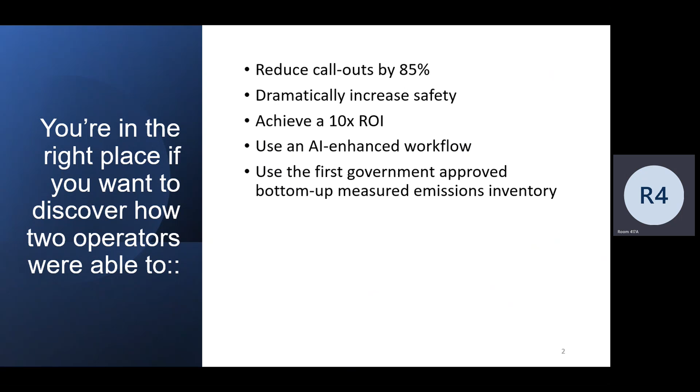All right, okay cool. Well, listen, if it's just, we can ask whatever you want, and I'll even give you some future looking stuff. Anyway, so this is kind of what I pitched in the thing, and I'll tell you why. You've seen this camera thing, and you know who I am.

In my past, I was an IT guy, and I actually started a magazine called Windows NT Mag in the '90s, and it went worldwide. It was 160 countries, 13 languages. It was a partnership with Microsoft. Yeah, you might have read it. So IT and software were my gig, whereas David was the oil and gas engineer and stuff like that.

So anyway, I don't know if we mentioned it, but we got the Top Innovator of the Year award from Darcy Partners. Are you guys a member of that, or do you even know? It's like an analyst group thing, kind of like Gartner. Anyway, the cheat sheet, that's one of the things I do.

All right, so I'm just going to tell you. A large operator, who I will tell you later since this is being recorded—I'll tell you exactly who it was off mic—anyway, they came out, and it was ops who brought us in.

They said, hey, why don't you build out 11 new sites without hiring night operators, or night riders, as you call them? They want to eliminate gate operators, eliminate 85% of their call-outs, dramatically reduce risk exposure to emissions and safety violations, and prevent liquid leak safety related issues.

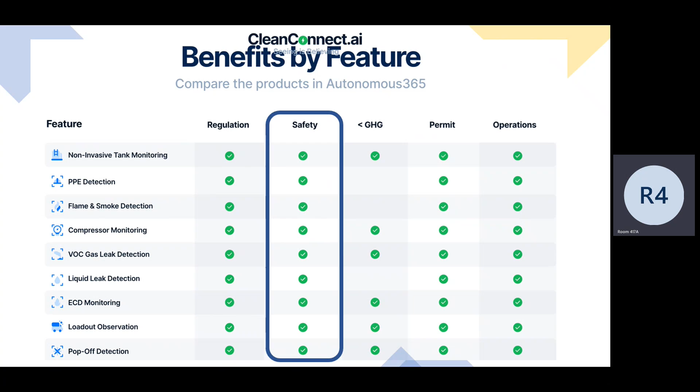Now, this little chart here was actually put together by the operator. I said, hey, here are all these things, but how do you view them? And so they said, well, hey, there's a regulation for all of these, but safety is checked on all of them. Then they said, hey, all these are for reducing greenhouse gas. So you can see some are safety related, then permit, and then ops. So the ops guys gave us this grid, and I said, so all these are safety related - let's look at that.

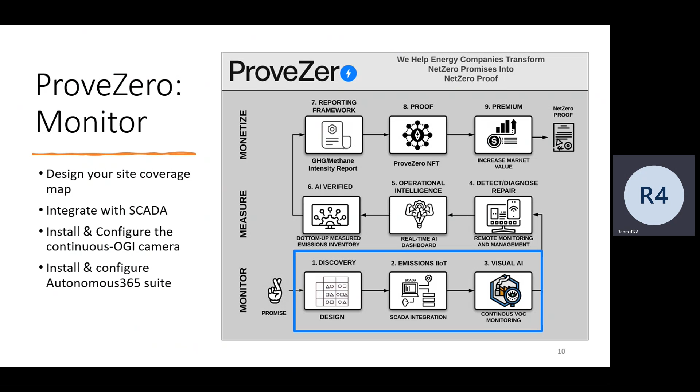This is our process. So when we start out with a new client, we do three levels: monitor, measure, monetize. Monitor is first - we do discovery, figure out which sites, what they look like, configuration. Then we figure out how we're going to integrate it with SCADA, and then we put the computer vision stuff on there. So that's the first one.

If you're not familiar, but you probably are, the OGI cameras, see VOCs, which is pretty much in a simple way, ethanes and alkanes - a bunch of ethanes and alkanes, right.

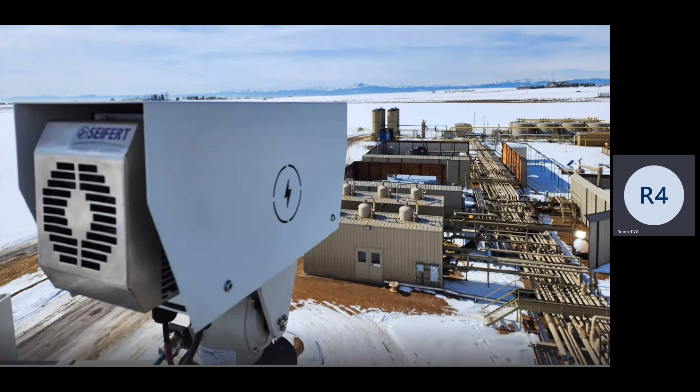Then you've seen this one here, where we mount it up on a pole, and camera placement is pretty key. We've got it down now to where we go in, we have a drone that goes up there and we look at the optimal placement, so we can see which angles are best to fit it in there. And then we get approval from whoever owns the site, ops. And then there's usually third party guys that already have MSAs that come in and do the infrastructure and all this stuff.

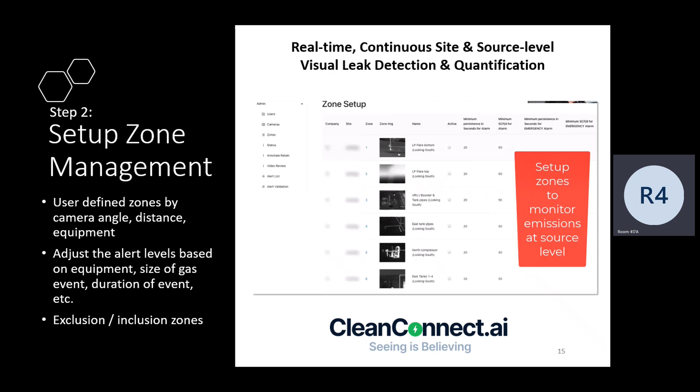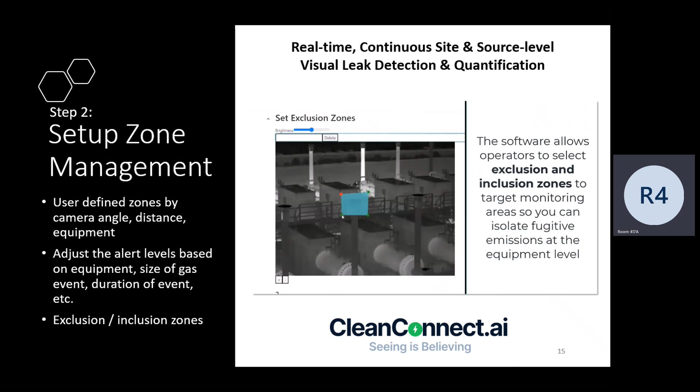This is what a bird's eye view looks like from our camera looking down. And then we do the tour stops, which is really key. We help find the optimal placement, because what we're looking for is the tour stop, name it right. And then we also now tie that in with the subpart W component level, so we can make sure it covers all of the required LDAR stuff you're supposed to cover. We're strictly talking the camera now.

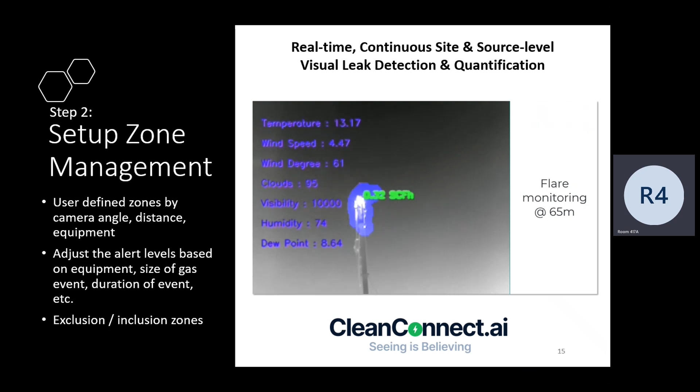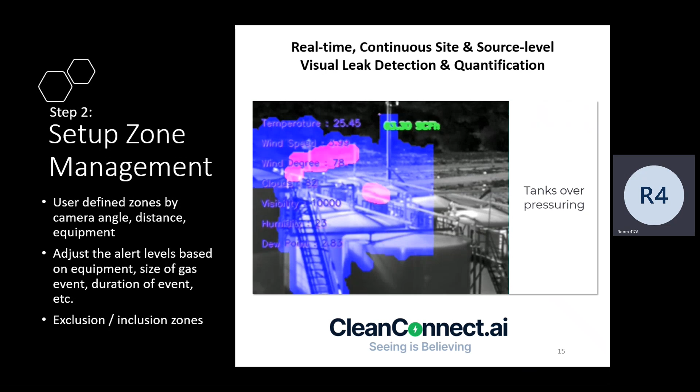Can we do this with the methane only, or the other one - same thing? They both can, one camera can't do both. So the cooled core can do everything because it can see all the alkanes, ethanes, and all that stuff. The methane camera can see methane only, but it's also an IR camera, so it can do liquid leak detection, can do a lot of things - it's not just gas.

So all this prep work, we do this in a simpler way with satellite photos. We usually start off with the Google Earth photo, where you see the layout of the site, and we can literally spot and dot something like that ahead of time, just looking long-term at cost and deployment.

And if we're doing site survey teams for all these sites, it's probably hard - but we're pretty good now just literally with the Google Earth drawing. There's some other stuff we do where, if you have other engineering drawings of the site, we're really good with some of those other models, the 3D models of sites, if you had those.

Just got offered to get 3D. Oh, is that right? Okay. Well, we're flying helicopters around our equipment, and they said they could 3D model it if we want.

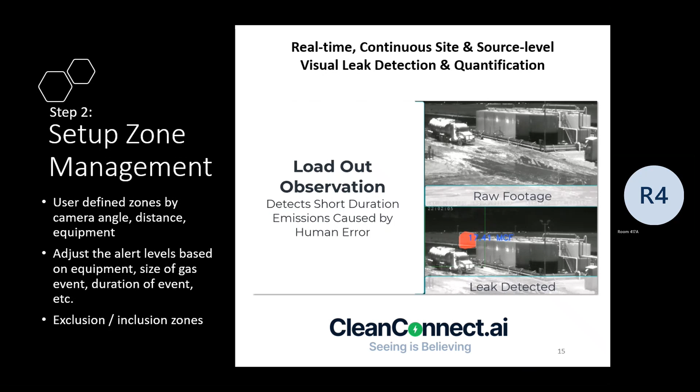We're integrated here on SCADA. You've got the cameras, the edge, going to the SCADA system, which is the point of truth. Then we have our dashboard to set the alerts, and other more visual alerts you can get. We do integrate more with SCADA, and I'll show you some stuff like that.

It would be a multi-connection. So some data you'd be looking at would be going to Ignition data, but some would be going to our dashboard. Maybe somebody like a Validere — we can API into anything up here.

This is what we had to do to get our Alt-AIMM: source level detection, blind testing, LDAR equivalency using the LDAR SIM model, the Alt work practice. Two operators endorse it, which is PDC and Civitas — that's public — and the EPA approval from EPA Region 8. And then the Alt AIM Reg 22, so it adds all the stuff from Reg 7: approved alternative workflow, approved tank level monitoring, approved loadout observation, and an alternative for Appendix K.

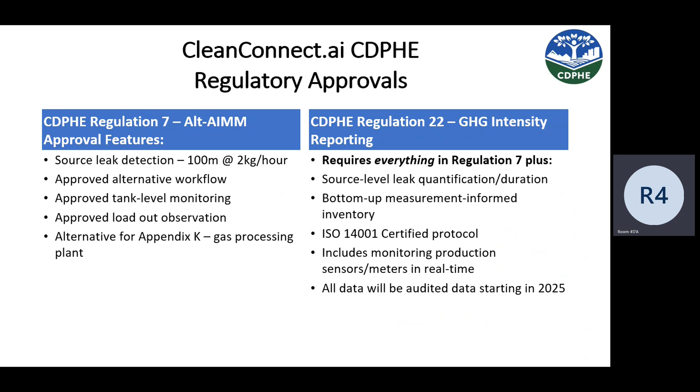We've also got approval for GHG intensity reporting — source level leak quantification and duration, bottom-up measured informed inventory, ISO 14001, which is a GHG certification. We also included in our protocol how we do the Clean Connect stuff. So all that's geared up for an audit in 2025.

Then our clients are literally allowing us to tie into the SCADA, so like to reboot a separator — you can fix the cold venting event remotely.

The way I like to put it: you're at your kid's birthday party. The old way, you get an alert, somebody gets in a truck, drives out to the site, and you miss your kid's party. The new way, you get an alert, you see it, crap, you fix it on your phone, you put your phone away, an hour later it alerts you and says, hey, I verified it's fixed, I closed the ticket out. So we have a workflow system built right in.

That was government approved, which is cool, right? Sounds good. I don't think we'd ever allow it to interface with our process control, but still you could use that data to hop out — just hop over to your actual app and do it. Yeah, so we don't do it, but you do it on some other SCADA system.

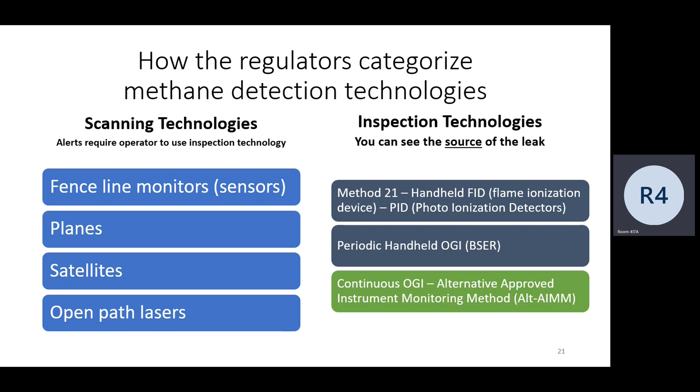So if you want to see the comparison, this was provided by a client. They had a fence line monitor around their site and they did a blowdown event. The fence line monitor didn't go off at all — didn't even reach 1 part per million. So the client provided this and said, here's what your camera saw. You see the blowdown, you put your colors around it, you give us a quantification — pretty dang clear what happened, right? This side, it didn't go off. So that's the diff.

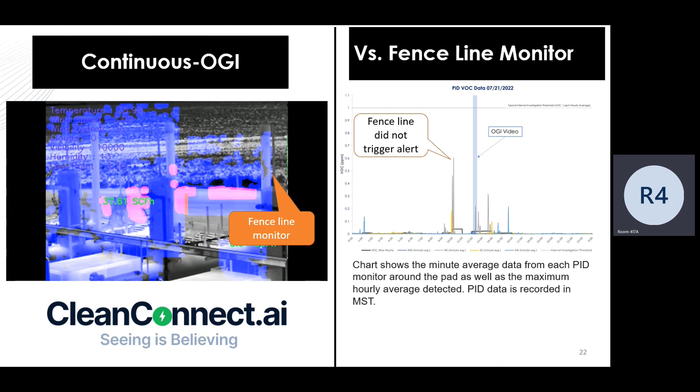And this was provided by a client who we thought was going to be so pro fence line monitor, and they came in and literally went 180 and said, no, we're done.

Leaks are not random. This could change over time, but here's what we're seeing: cold venting, tanks overpressuring, loadouts, and then other. That's what we're seeing.

What's cool about cold venting is all of our clients with modern gear have been able to fix this remotely, just reboot it. What happens is the pilot light goes out and the state is off, so SCADA says it's on, but it's actually off.

Tanks overpressuring, we're working on this with the clients because they see it over and over and over again. So they're like, how do we fix this?

Loadouts, pretty easy to fix. You call up the pumper truck company and tell them that if they mess up again, you're going to fire them. And they said, well, we didn't mess up. Dude, I saw your truck arrive. I read the license plate. I saw John Doe get out. Literally, everything is observed in real time. There's no way to wiggle out of it.

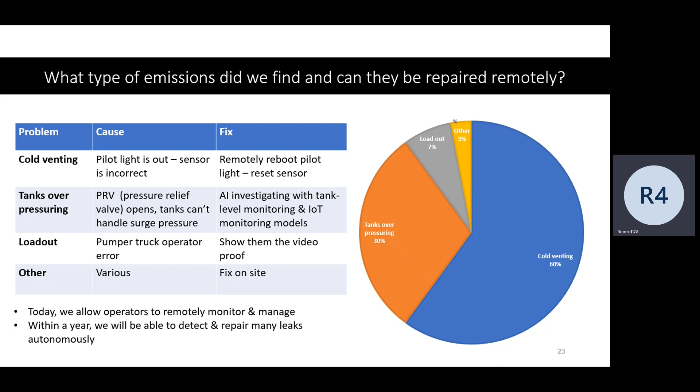So now there's other stuff in here. We see compressors leak, we see other stuff. But it is so not random. And unfortunately, the way the regs are written, it's as if leaks are all random. They're not random. There's certain stuff that ops sees all the time, which means its emissions are an ops problem.

The big change we see here is the impacts of Quad OC, number one is staffing and call out. I don't think a lot of people have done the math, but I started doing the math here, just to give an idea. This is part of my cheat sheet.

The big thing here is LDAR frequency is going from Quad OA every 6 months to quarterly, and also with Quad OC quarterly. The big deal here is this is all the sites from November 15, 2021, and all the sites before, all of them. Nothing's grandfathered in with Quad OC, zero. So unlike Quad OA, which kicked in 2015, Quad OC says all sites are covered.

I've had people call me up and say Quad OC is literally increasing my LDAR by 700% because it's covering a whole bunch of sites I never even had to look at.

Now, how does that compare to Colorado Reg 7? Well, Colorado Reg 7 is monthly. And for pre-production, Colorado is continuous. From 10 days before the drill hits the ground, all the way through the first 6 months of production, it's continuous monitoring required. So Colorado is even beyond that.

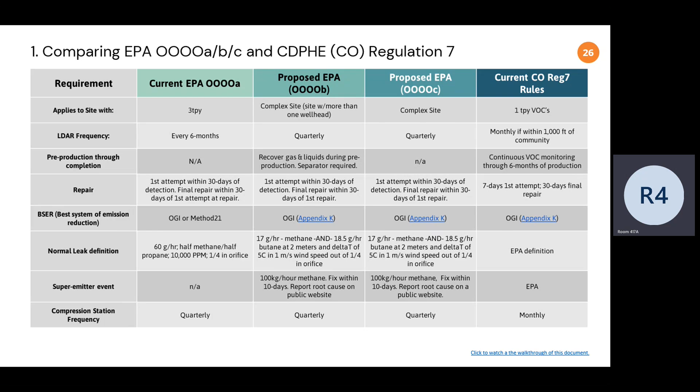Just to give you an idea what that looks like, here's Colorado's LDAR 2021 summary: 147 companies reporting, 14,796 sites inspected. Check this out, in Colorado alone there were 599,006 inspections. So in 2021, Colorado did more LDAR inspections than all the rest of the country combined.

That's the level when you go to monthly, this is how big it was. Average 40 per site, this is all from their actual LDAR summary. So Colorado is spending a crap ton of money on LDAR. If the average human can do 400 inspections, then you need 1,497 inspectors in Colorado.

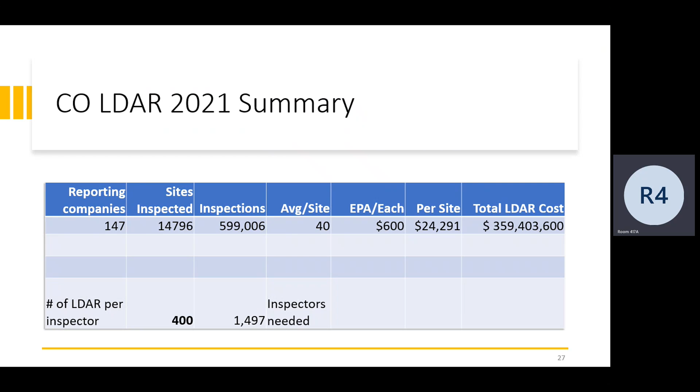So big idea: what if you could reduce 85% of your LDAR schedule callouts by doing automated inspections? That would eliminate 509,000 callouts in Colorado alone, if they started little by little replacing manual LDAR with autonomous LDAR.

Putting a person in a truck and sending them out to a site is the number one safety issue, according to the operators I talked to. In addition, it saves a lot of money on people, trucks, and insurance.

And in some states, like Colorado, they're requiring all the operators to replace their entire fleet with EV trucks. But I tell them, hey, it's a lot cheaper to lower the need for trucks rather than replace all your trucks with EV trucks, if you can eliminate a lot of callouts.

Now here's the math for Quad OOOOc. You double the frequency, so instead of 2 times a year, now you've got to do 4 times a year, and for all the sites going all the way back to 2003.

So I started doing the math. That will cause operators to add collectively across the US 1.6 million new LDAR inspections. That's a 471% increase. So using the EPA's formula of $600 per LDAR, that's an extra $831 million of LDAR expense.

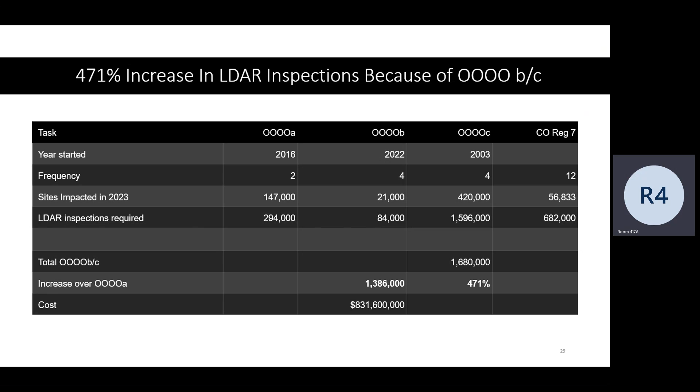So other stuff we do, the tank level monitoring, using the long wave, and we're as accurate as guided wave radar there.

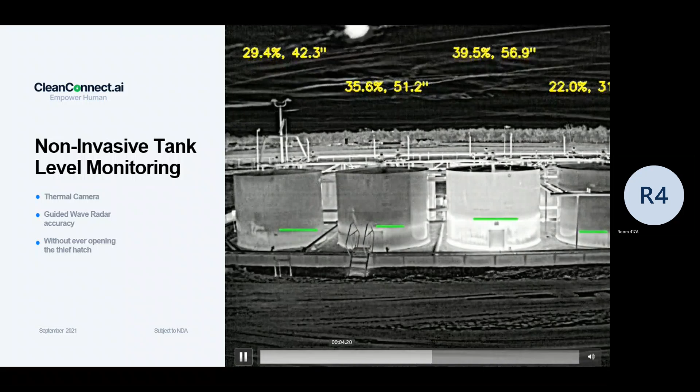And the liquid leak that we do. Now this liquid leak, the first round was done with fixed mounted cameras that we're looking at tanks and stuff, but the new one we have is part of the rotating one. So now we can do liquid leak on tanks specifically, but we can look at liquid leaks all around now. We also modified the computer vision model - the first phase just did really quick leaks, like pinhole leaks that were quick. The next one will look at slow leaks that literally take like a day to accumulate or more, which tends to be the kind of ones that you get right before a fire tube failure.

The hard hat we do, which also doubles as a security one, the flame and smoke that we do, the ECD monitoring that we do, and I have something else I can tell you later about combustion efficiency that we're adding.

The virtual gate guard, this was actually added by the second operator who needed to let go 45 gate operators. But again, it looks for trucks, it reads the license plate, and it looks against an authorized list of plates.

And again, this Alt-AIMM workflow, the one I showed you, it works for all the models the same. So when you get an alert, it's not just gas leaks, you could get it for liquid leaks, you get it for flame and smoke, you get it for whatever. So now you have that same sort of detect, diagnose, repair workflow that'll work for any of the models.

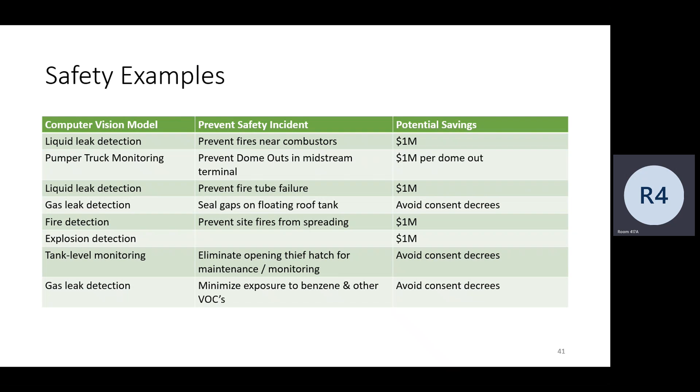Build out new sites without hiring night operators. Again, the operator said that would save me 60 million bucks over 11 years. Autonomous gate guard was saving them 40 grand a month.

Increase in LDAR inspections, they're eliminating a lot of callouts. But what's really different is the operator said the most senior operator said, I can manage 30 sites myself through this, and what's really cool is I'm watching them 24/7.

He used to send a runner out to go see what was going on, but he said, I'd have to look through their eyes: well, what do you see? What's happening? He says, I don't need to call them anymore, I'm literally looking at the screen. So having your most senior people be able to diagnose across dozens of sites is helping them out.

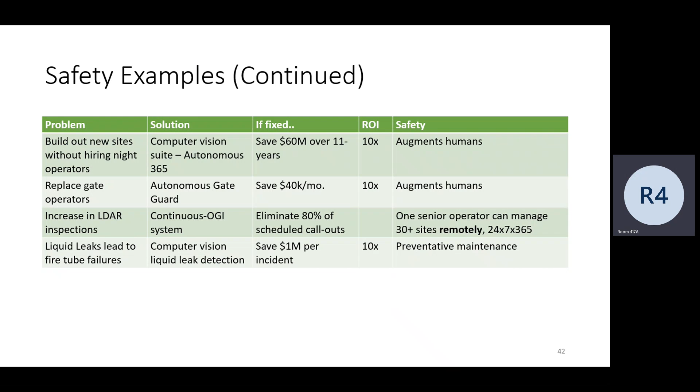Liquid leak, fire tube failures, again preventative maintenance. The big deal here is, on the retrain side, we use deep learning training.

This is done now by multiple operators where they do controlled releases, using a high flow sampler. We look at that video on the OGI video, run it through a deep learning model, then check blind test data, and ask, is it getting better? Is it within a certain goal of accuracy? If not, retrain, retrain, retrain.

So we went through an initial set of training. The operator said, hey, you're really good, good enough for ops to get a relative size on there. Now we're going through the next round of training to get it even more accurate on the smaller stuff. Now, why that came into play is because of our alert levels.

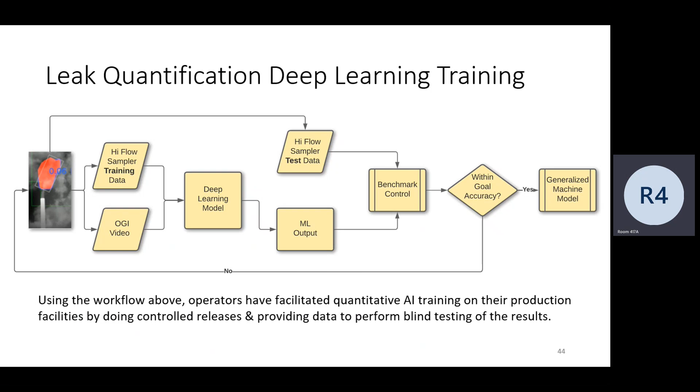We allow operators to set multiple levels of alert for each tour stop. You get the leak source, the quantification, and the duration, then you can set alert levels at each tour stop. Level 1 says, I want you to log it, just record it, don't alert anybody. Level 2 is alert an individual. Level 3 is alert a bunch of individuals, like it's on fire, send it to 10 people. Each tour stop allows 3 levels.

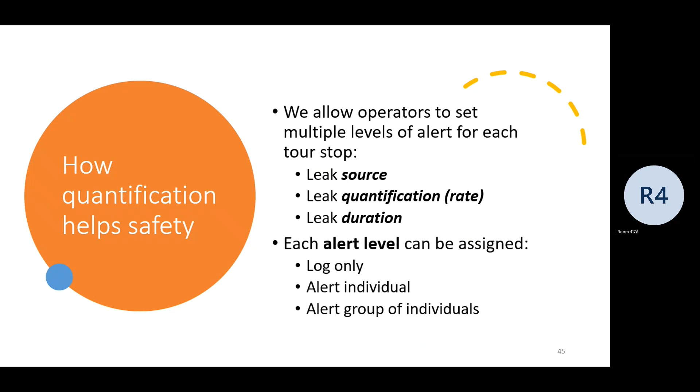And that's why quantification will kick in, saying it's this big or it's this long, we want you to go all hands on deck.

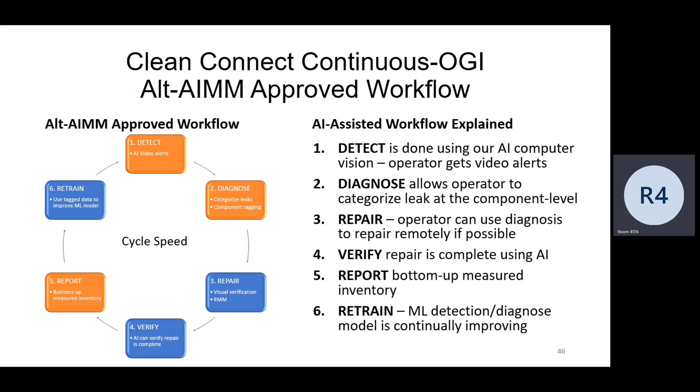What our ops tell us is cycle speed is key. The faster I can detect, diagnose, and repair, especially something like cold venting, the less problem I have and the better I get back to my site running optimally. The key is speed.

We can send satellites out right now looking for super emitters, which look for 100 kilogram per hour leaks. I checked with GHGSat, who are here today, and asked could you see a 100 kilogram leak? They said easy, and we're going to be over the Permian 5 times a day.

The Clean Air Act sets a fine for cold venting, like an unlit flare, at $37,500 times the number of days since your last LDAR. So with traditional LDAR, say you found it almost at the end, you checked your LDAR, and now it's 90 days later, on the 89th day you have an unlit flare. That's your fine, times the number of days since your last LDAR.

With our Alt-AIMM, our LDAR is done every hour, so we find them so fast we're not going to even get to that. A cold venting event will accumulate 100 kilogram/hour to be seen from space in 3 hours, so just one cold venting thing going off at night will be seen. EPA is proposing raising the unlit flare fine to $100,000 a day, so they want to get rid of those.

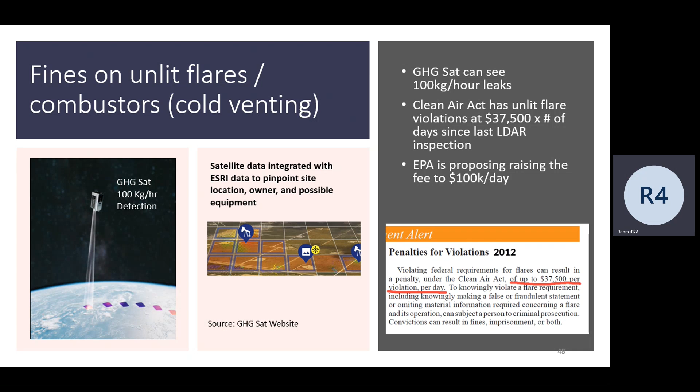And if you have any investors who want proof of emissions or whatever—I have a whole thing I'm doing tomorrow for 4 hours where I'm going to go deep into the SEC reporting. So we actually are working with the report company here that Civitas hired to basically feed them the data they need for LDAR reports, emission inventory, and the SEC climate risk reporting.

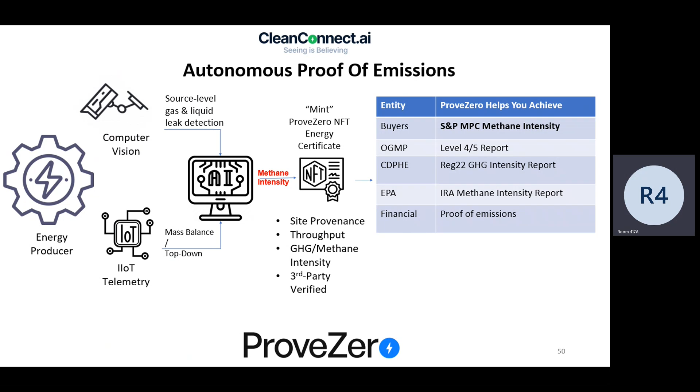So this is what our ops guys tell us. Number one, it's permits—you guys help us win new permits. People—it's hard to find qualified people, so they like to clone their best people so they can be in more places at once. Process—they want to manage by exception.

Efficiency is built down—once they get used to RMM, they want to keep doing it, like, I want to do as much as I can remotely, with reduced call outs. Proof—prove that you're producing clean energy using government approved methodology, which is our ProveZero thing. Product—by detecting and fixing problems quickly, we enable our operators to create a better low methane intensity product.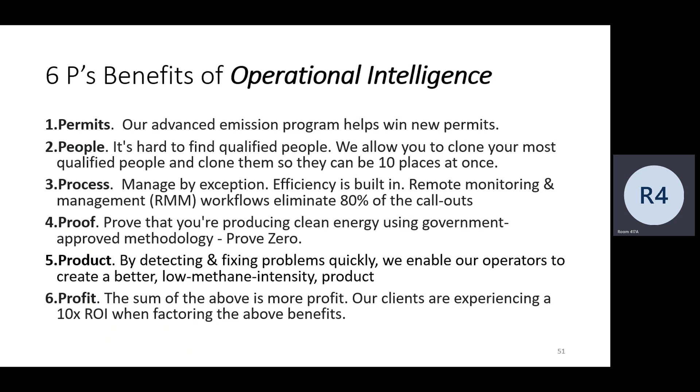And if you do all the above, you get a profit out of that. So it happened to work out to 6 Ps, right? Predictions—the hardware, OGI camera, PTZ units, edge device, they're all getting better, faster, cheaper. Moore's Law—we're benefiting from that because we were agnostic about those. So we had hardware companies competing for our business, and it ended up getting better, faster.

Computer AI vision is improving. Honestly, I'm in this business, and when my director of AI comes with a new model change, even Dave and I go like, dang, that's getting good. It's getting scarily good, right? But it can always be better. We're always like, dang, that was better, but we can do better. So it keeps improving.

RMM software will revolutionize the way operators manage field ops. And I do think it will even change the way service providers work, where people are going to do more like compressors as a service, combustion as a service. In other words, they make money when stuff doesn't break, not when it does break.

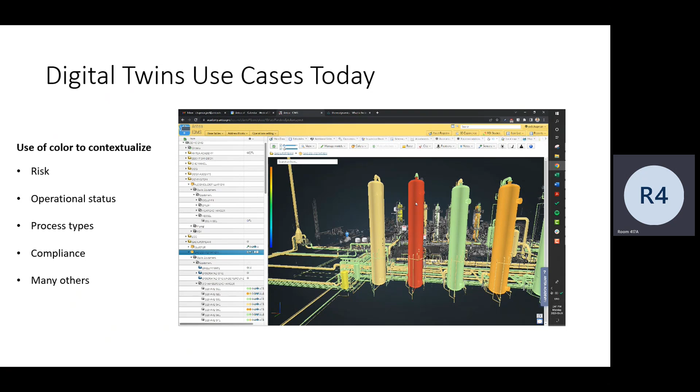There's one other thing I didn't tell you about, but we have a joint—we're working with Antea, and they do asset integrity management. So we're working on something so we can tie in, like if you had refineries or midstream with lots of parts, our two systems can tie in together. For example, they're doing x-rays of welds, x-ray stuff for preventative maintenance, which we're then ingesting through our computer vision.

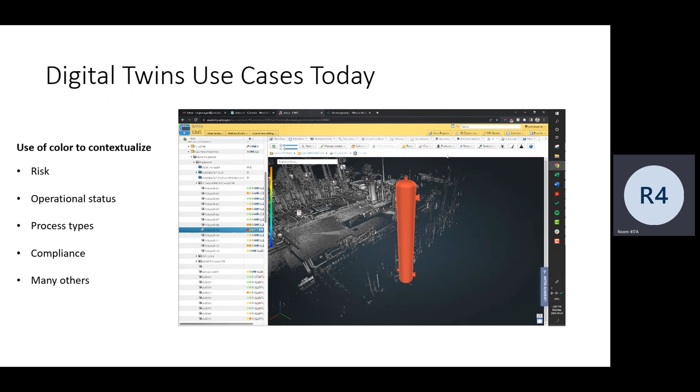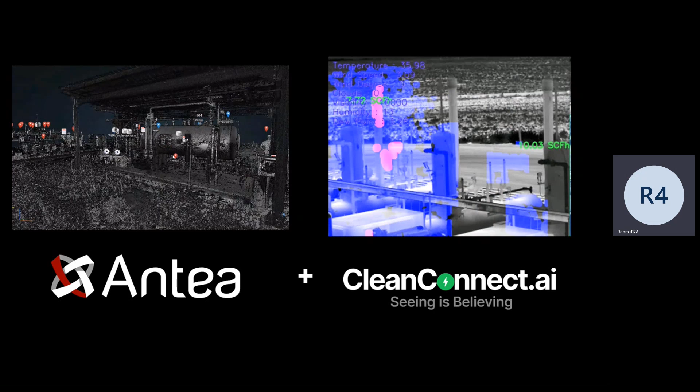Their big idea was this: Antea digital twin plus our computer vision equals digital twin 2.0. Because nothing beats seeing a real video of a part and tying back into the source data—literally the underlying physics of the data of the part. So there's a couple of refinery projects we're working on where we can do digital twin plus our computer vision. So anyway, there you go.